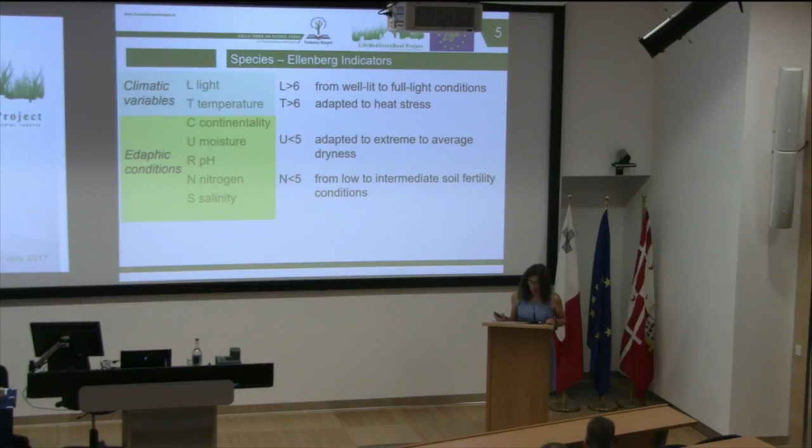In this table, there are Italian species cultivated in the green roof simulator and their Ellenberg indicators. In this table, I reported only the species of the Italian green roof built during the project. We observe they belong to the two biological forms of hemicryptophytes and chamaephytes, and their habitat of origin is often arid, sunny, and stony.

Other parameters to consider might be physiological ones like water need and water stress resistance, type of photosynthesis, C3, C4, and CAM plants, and chlorophyll and carotenoid content.

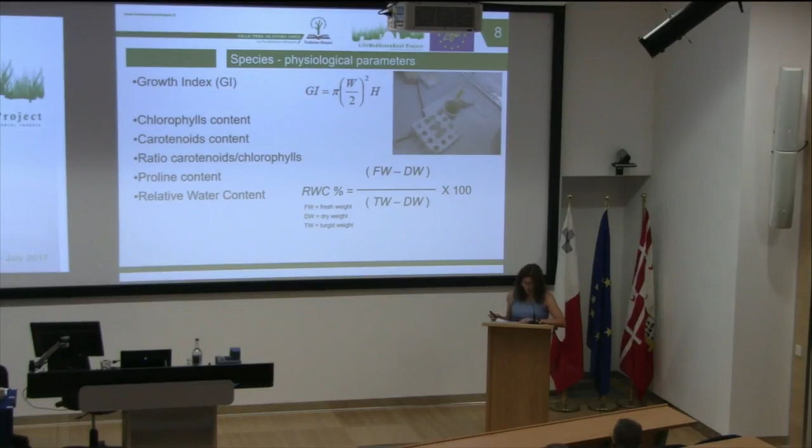During the project, we tested the resistance to water stress in many green roof species, and in particular, we evaluated growth index, chlorophyll and carotenoid content, the carotenoids/chlorophylls ratio, proline content, and relative water content, an analysis which describes the water status of the plant over time. For each species, plants were irrigated with the gravimetric method according to 3 different values of pF.

pF is a numeric index correlated to the water potential, which quantifies the work plants have to spend for root absorption. pF is the co-logarithm of the absolute value of water potential, and its advantage is the simplicity of its scale, because it may vary from 0 to 7, and it has a linear scale and not a logarithmic one like water potential.

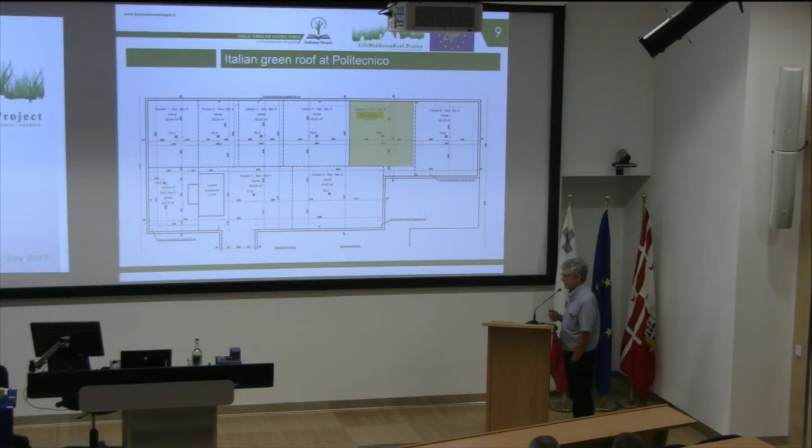In Milan, you have already seen the position of the plot. It is a 30 square meter area. It has been planted with our species in the same arrangement. This is how the green roof at Politecnico is done. Please consider that this building is much older than ours. It is maybe more than 30 years old. And this is building 15 of the Politecnico.

You can see the slab and the sensor. You can see the heat flux sensor, the temperature sensor at various levels.

Here is an example of how we do the recording of the data, done by means of software that takes the records and puts them in a MySQL database, then uses it to make a graph. Now we start with the data we recorded.

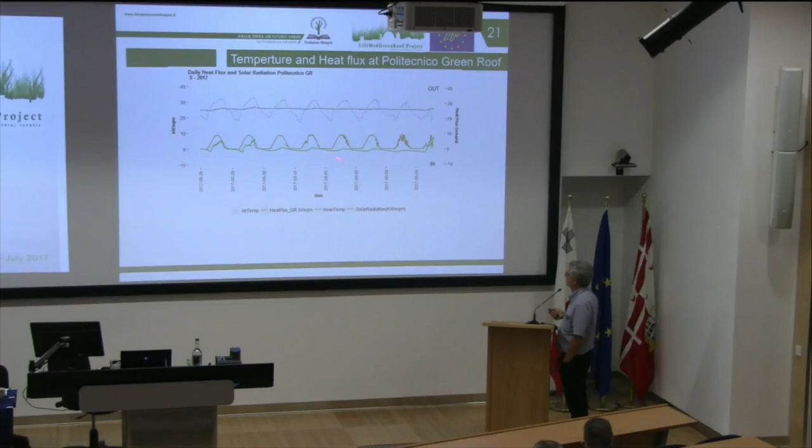But even in a green roof, in summer months, there is a gain of heat.

This gain in energy in Politecnico, but not in Minoprio, can be explained by the fact that the technology of the roofs has changed in 30 years. So we have a very low U value, while the Politecnico buildings have a higher value of transmittance.

The difference in behavior of a green roof in springtime has been reported also in foreign experience, where green roof in springtime sends outside more energy than a reference roof.

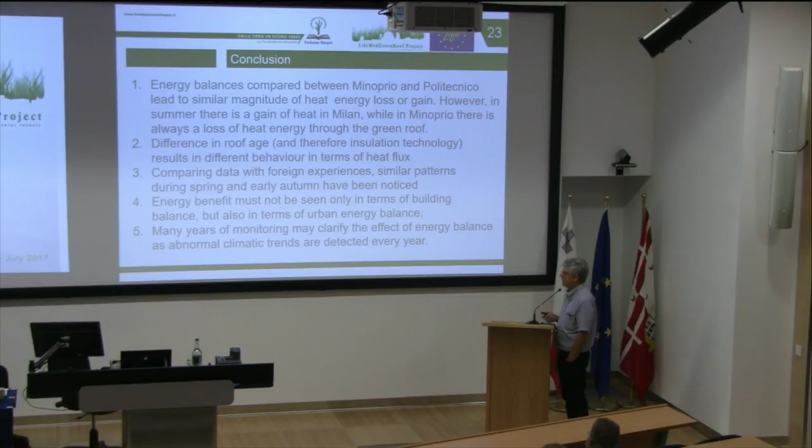I'll be introducing another document that we have drafted, which is a policy proposal document. I will be followed by Mr. George Cutajar, there he is, from MCCAA, and he'll be speaking about the green roof standards for Malta.

After that, we would have Chiara Catalano. She will be introducing biodiverse green roofs, and we'll end our session with another LIFE project in Poland by Kinga, it's the Radom project. Okay, and then we'll hope to have some time for discussions and questions. So I'll try to go as quickly as possible because we are a quarter of an hour late.

It is widely accepted that urban areas have problems, and that these problems are affecting our quality of life. Green roofs are considered as part of green infrastructure, and they have proven benefits to society in a number of ways, and these benefits are both for the individual, the community, and biodiversity.

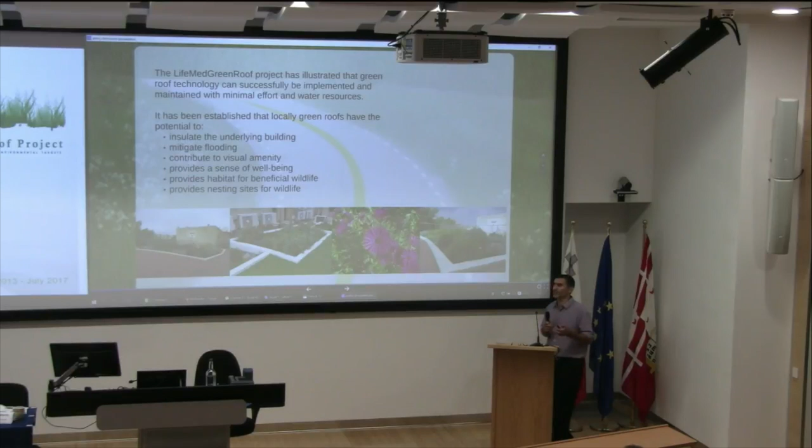The LifeMed Green Roof project has illustrated that green roof technology can successfully be implemented and maintained with minimal effort and water resources. We cannot say otherwise, plants need to be watered, but it is not as demanding as one might think in terms of water and even in terms of management. It all depends, however, on the type of species one uses, and what one expects.

We've mentioned that when green roofs are installed by individuals, they contribute to social benefits as well. We have to keep this in mind. When an individual installs a green roof, the benefits are not just enjoyed by the individual, but they are also enjoyed by society. So whoever constructs a green roof is contributing something to society.

However, although green roofs provide a number of social advantages, it is the private benefits which will induce owners to install green roofs. We have to be realistic here. Nobody is going to spend all that money to build a green roof so that his neighbor enjoys the view. The individual has to enjoy the green roof as well. So it is in the interest of a nation, in the interest of society, that green roofs are replicated through policies, incentives, and regulations.

Green roofs' benefits are only experienced if the technology is widespread over the territory. Our green roof here will not solve any problems, but it might have solved some issues with our administration, because now rather than looking over the black membrane, they're looking at some plants. They've got butterflies there and birds. And that sort of benefit is realistic.

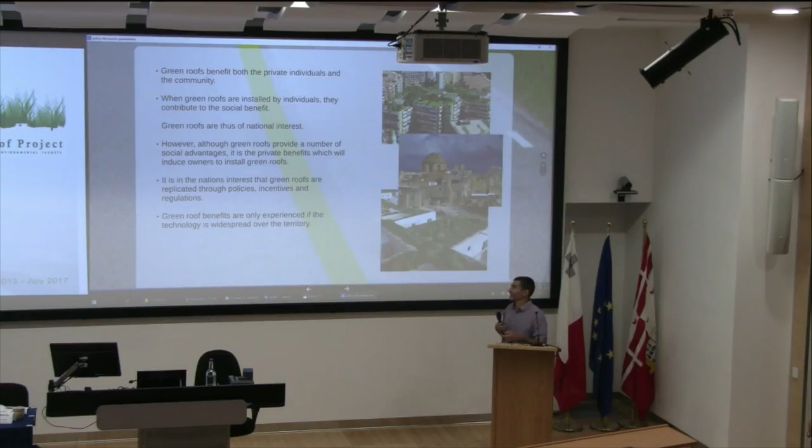So obviously it's useless. We cannot wait for people to voluntarily construct green roofs. It's not gonna happen. We know what happens with PV panels - nobody installed PV panels before the incentives were put in place.

6 phases have been identified in establishing green roof policies. These phases are not rigidly classified and can be implemented as necessary and are interchangeable. I'll go through them quickly.

Introductory and awareness: stakeholders are to be made aware of green roofs and their benefits. Such awareness can be instilled through workshops, information sessions, visits to demonstration green roofs. This is one of such activities.

As the LifeMed Green Roof Project, we've had published articles in newspapers and other journals, organized public lectures and information sessions. We had NGOs asking us to conduct lectures, and even schools. We had the Department of Education come here and visit the roof, because that is a very important education tool. Throughout these past 3 years, we had a lot of information sessions, and we tried to introduce green roofs to schools as well and other entities.

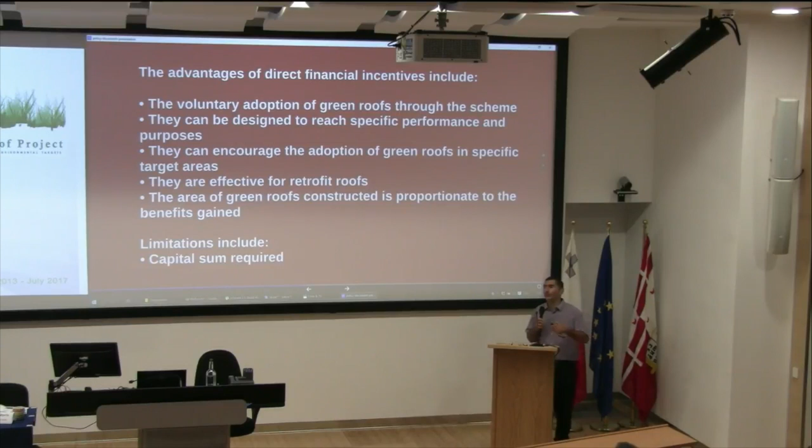The advantages and disadvantages. The voluntary adoption of green roofs through the scheme, so you have people actually volunteering to construct green roofs on their property. They can be designed to reach specific performance and purposes. They can encourage the adoption of green roofs in specific target areas. They are effective for retrofit roofs, and the area of green roofs constructed is proportionate to the benefits gained. Limitations include capital sum required. Obviously, if government has to reimburse a sum of money, then there has to be capital.

Indirect financial incentive relates to the pay-per-use of stormwater disposal and usage. That is charges for water consumption. So the more water you consume, the more money you have to pay, and also water runoff from the properties. What does this mean? If you have a property which is totally built or consisting of hard landscaping, so no water is practically absorbed, it all goes into the street. So you pay a sum of money because you are actually constituting a problem. You're directing water that lands on your property into the public domain, and that is contributing to flooding.

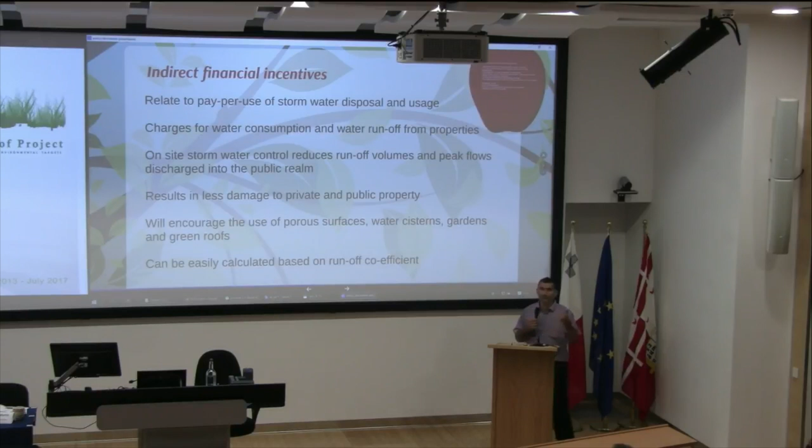On-site stormwater control reduces runoff volumes and peak flows discharged into the public realm. So if you have a well, if you have a garden, if you have a green roof, then obviously you are contributing to reducing the problem. So obviously you get less fines, so to say. You're less taxed.

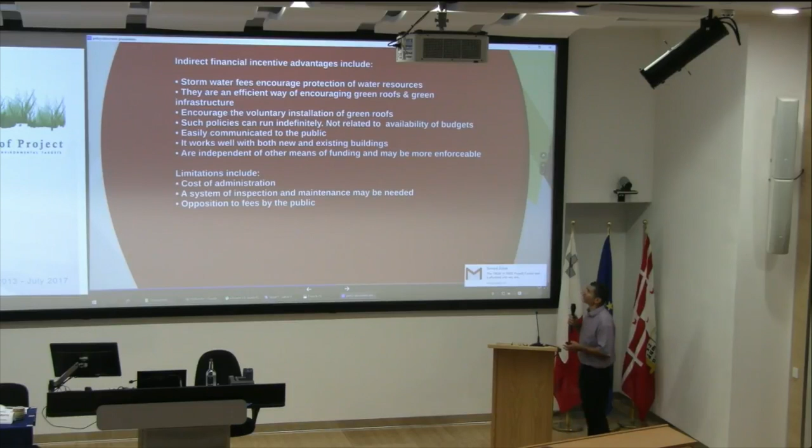Indirect financial incentive advantages include stormwater fees that encourage protection of water resources. They are an efficient way of encouraging green roofs and green infrastructure. Why? Because if I've got a property which is totally built, if I put a green roof on top, then I get a reduction in the fines or taxes I have to pay. They encourage the voluntary installation of green roofs. Such policies can run indefinitely because the policymaker wouldn't need capital. Easily communicated to the public, they work well with both new and existing buildings and are independent of other means of funding.

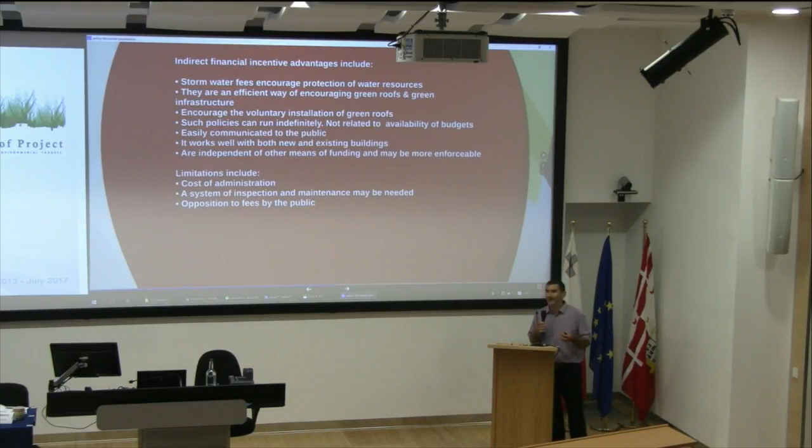Limitations: cost of administration, a system of inspection and maintenance may be needed, and opposition to fees by the public. Obviously, if you're going to tell people they have to pay, they will oppose it, but after all, that is what you want because you want green roofs and other green infrastructure to be implemented.

Ecological compensation. This looks at greenfield and brownfield sites which contribute towards mitigation of flooding and biodiversity. If you've got an unbuilt plot, any water runoff which finds its way into that plot is absorbed, and so you are contributing to mitigating flooding there. Their construction reduces public benefits. Green roofs compensate for such losses. If you had to build a green roof over a plot which has been newly built, then you get compensation for that.

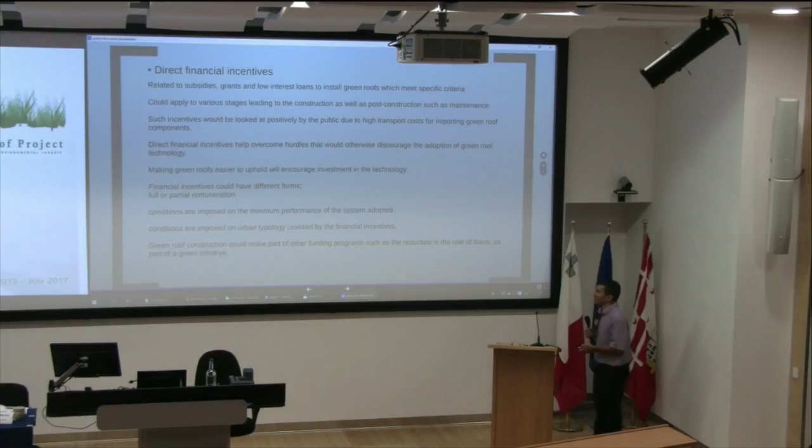Indirect financial incentives, personally, to be honest, I think this is the fairest of all incentives. Why? Because much of the problems we have today, if we're looking at flooding, for example, are happening because of soil sealing and the lack of water harvesting facilities. We know that there are a lot of buildings being constructed without wells. So people are getting richer, they're getting financial gain, but at the same time they are loading the public with problems.

So I think putting a fee on soil sealing is a very fair system, whereby if you have a green roof, if you have permeable surfaces, according to the coefficient of your system, you get a discount. And I think that is pretty fair. Obviously, with policy makers, it doesn't sound right because people won't agree to it. But then again, if I ask who wants to pay taxes, nobody would want to, but we still do.

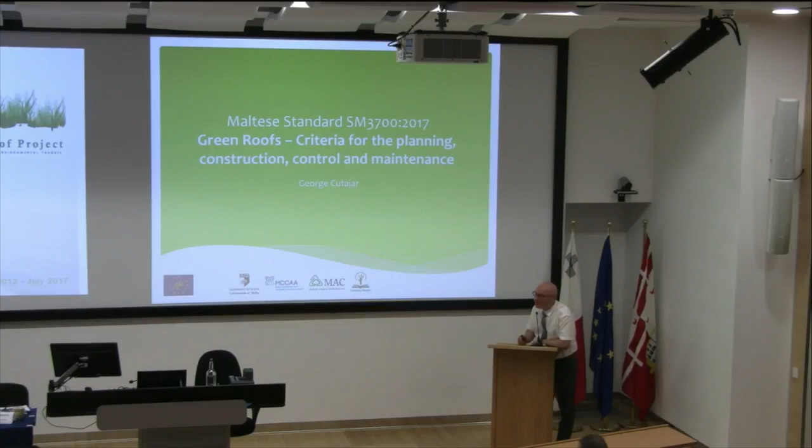So, good afternoon, everyone. I am George Cutajar, from the Malta Competition and Consumer Affairs Authority. Back in 2013, the LifeMed project approached MCCAA since we, as an entity, have the legal obligation to develop national standards. Back then, in 2013, they approached us and we agreed that we go for a national standard on the construction of green roofs.

In 2016, I think at the middle of the project, we started the project for developing a national standard. The process mainly consists of setting up a technical committee made up of national experts. We invited these interested parties to develop the standard. In fact, the standard is published, and it also contains reference to all those participants that developed it. So, a brief description of how we developed the standard: basically, the national standard was developed in 9 months.

We had a series of meetings, and after we had the final draft, the standard was put for public consultation. During this period of 2 months, we invited feedback from interested parties outside the technical committee on the actual standard. During this time, we received one type of feedback regarding the life cycle perspective of the material used in the green roof itself. In, I think, June, we published the standard. As an authority, we have the remit to publish the standard in the Government Gazette.

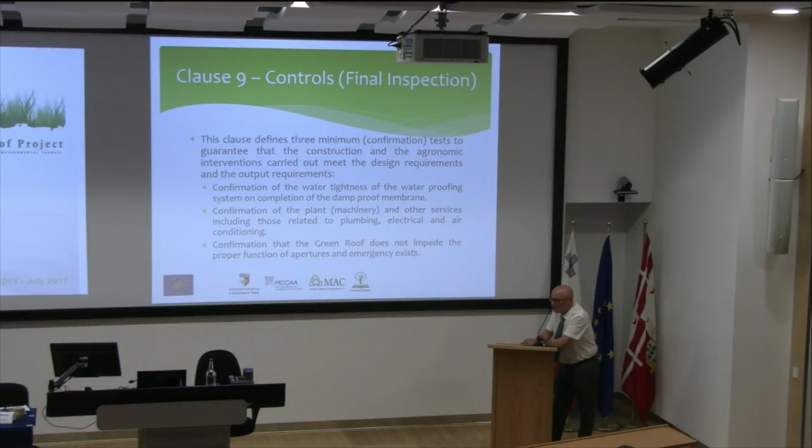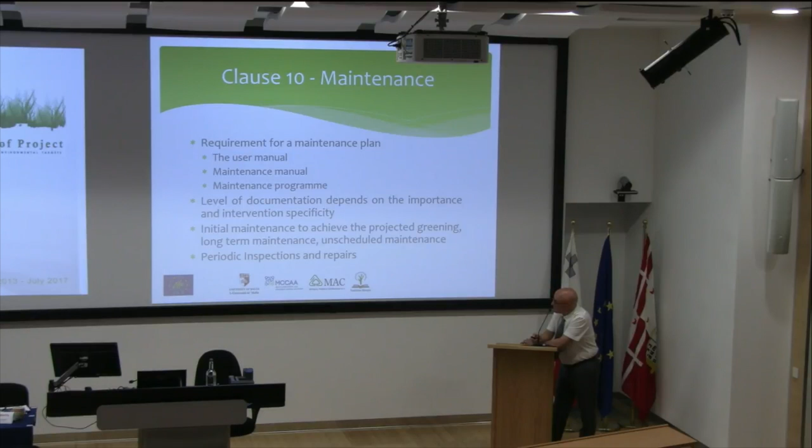We also considered maintenance, requirements for a maintenance plan, issuing of a user manual. When one comes to commissioning, one can deliver a user manual, a maintenance manual, and also a maintenance program. The level of documentation depends on the importance and intervention specificity. Initial maintenance to achieve the projected greening, long-term maintenance, other unscheduled maintenance, etc. And at the end, periodic inspections and repairs. Of course, it all depends on the type of green roof that one is considering. So that was the last clause of the standard.

The standard is currently available from MCCAA. I am sure that, for example, architects and other companies in this field would like to review this standard. I am giving you the contact through whom we can make the standard available, even for regulators, for example. Thank you.

So the topic, as Antoine already said... first of all, thank you for the invitation. And I apologize for Stefan Brenneisen, who is my boss, actually. He should also be here, but he couldn't make it. And so I'm glad that I finally visit Malta, even though I'm a neighbor, since I come from Catania. I never visited Malta, so that's my first time, and I'm very happy to be here.

So the topic of my presentation today is biodiverse green roofs. As a matter of fact, I also did a PhD on that topic, and I also developed some Mediterranean features that I will explain at the end. So I will then go into some examples in both temperate, which is actually a Swiss, German experience, and then

Mediterranean situation. Maybe can I have the microphone, because I feel like I cannot move. But yeah, whatever. So first of all, as has already been mentioned by many today, actually I have the impression it has been a very long conference, but as a matter of fact, it's only one day.

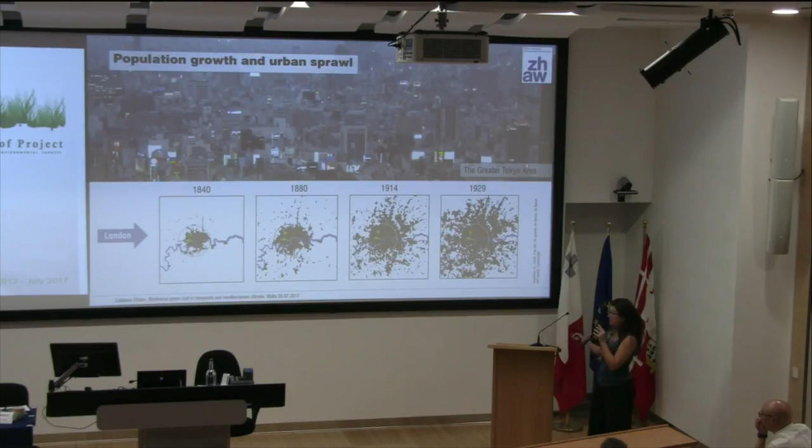Of course, that's a very simple example of how the city is actually eating into the surroundings. That's why we talk about city metabolism in general. And this is just a scheme done by a Finnish architect, Eliel Saarinen, in 1943. He was sketching the development of London from 1840 to 1929. And nowadays, of course, the situation is even more extreme.

As I mentioned before, we talk about urban metabolism. And ecologists consider cities as heterotrophic ecosystems. What does it mean? It means that cities consume energy from outside sources, and they transform it to run transportation of people and goods and to develop technology, industry and products in general. So what is happening in cities then affects the environment, in the sense of heat and waste in general, just to be easy.

But of course the result is very clear and evident, in the sense of the alteration of biogeochemical cycles and the alteration of local climate. As for biogeochemical cycles, I mean water, for instance, because we spoke a lot about water cycles, which have been completely altered by soil sealing. And then local climate, so the urban heat island effect, and of course pollution, the fine particles, etc. As regards land use and cover, we are all aware of continual soil sealing. And finally, which is the connection to green roofs for biodiversity, it is causing habitat fragmentation.

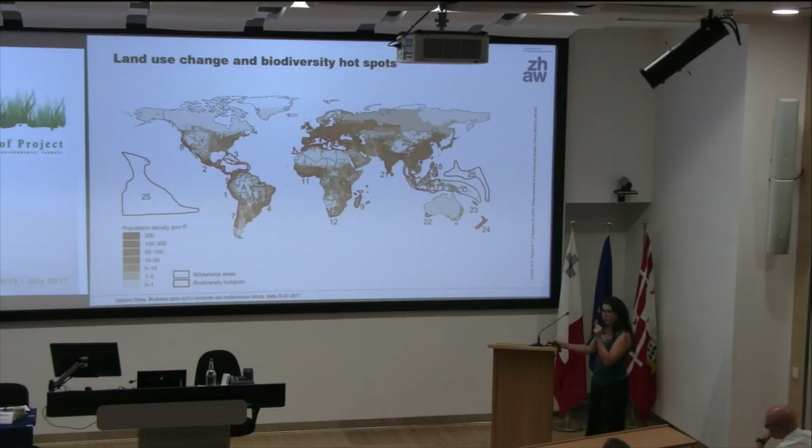But what's the problem? Where is the conflict between nature, habitat fragmentation and the development of cities? The problem is that cities are not randomly spread around the planet. Actually, population density is concentrated in biodiversity hotspots, and one of the hotspots is the Mediterranean basin, where we are. That's why we absolutely have to concentrate on urban environments. Urbanity is becoming ever more popular and constant, and that's why it is the place to intervene. But there is a but.

Fortunately, there are designers who see the glass not half empty, but half full. And I quote here Gilles Clément, a French landscape architect. I really like this concept of the third landscape, because it describes very well the situation of the habitat remnants inside the urban cores, as is shown there.

So that's kind of a scheme of a settlement. You have scattered habitat fragments, which are denser and smaller in the cores, and then bigger but more distant areas in the peripheries. And the biodiversity of the third landscape is influenced by the pressure of the anthropic territory.

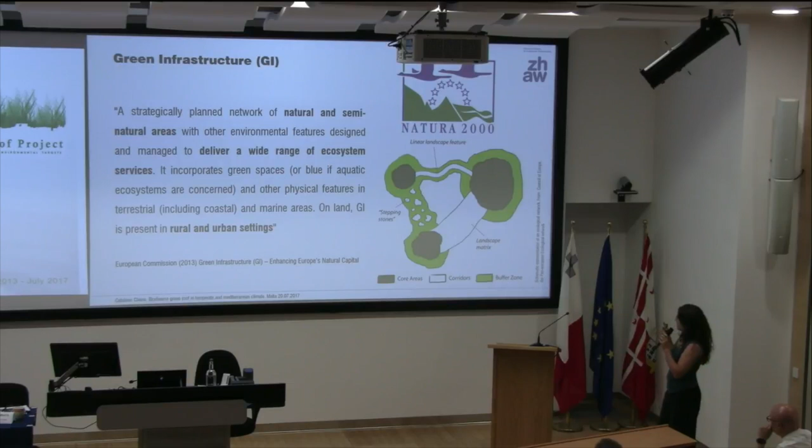Then we go into green infrastructure, because this third landscape is indeed the green infrastructures, and in particular the urban green infrastructure. The backbone of the green infrastructure in Europe, as everyone knows, is the Natura 2000 network, defined by the Habitat Directive and the Bird Directive in 1992 and 2009. What is important for the survival of this network is the connection between them via stepping stones and ecological corridors.

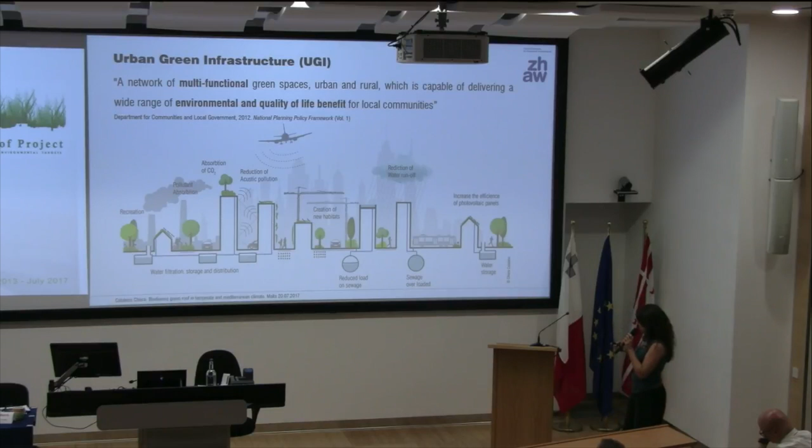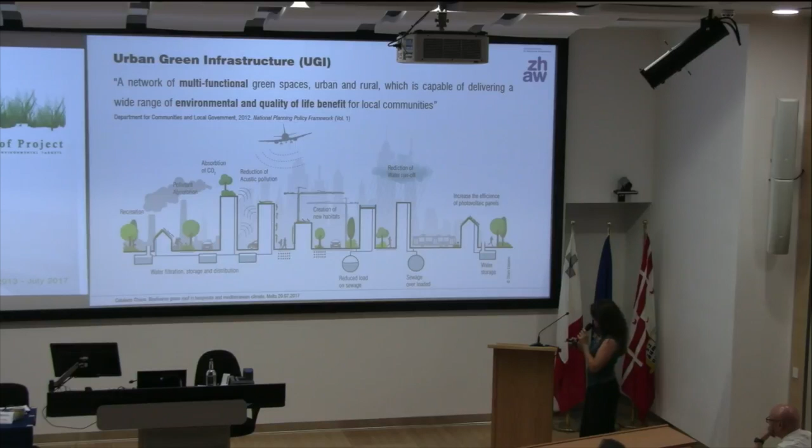So finally, green roofs are part of the urban green infrastructure. I like this definition because it's simple and easy: green roofs can be synthetically defined as surfaces covered with growing medium, intentionally vegetated and/or spontaneously colonized. I like to highlight this 'spontaneously colonized', because actually green roofs started just with spontaneous colonization on the old German roofs of the 19th century.

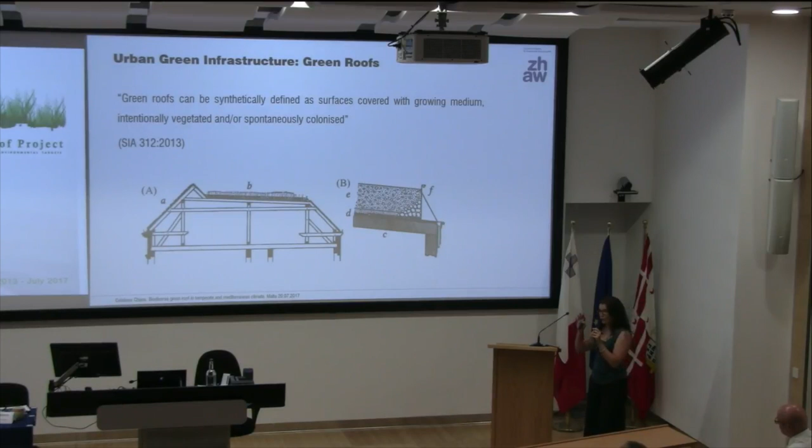So it's something we have to keep in mind, that green roofs are not like a static ecosystem, but they are dynamic. So we don't have to just try to make them like a picture. It's not a review like a journal, it's life.

And those are some green roofs which I investigated in 2015. I made a study on these roofs, which are part of a settlement. And that's the Waldorfschule.

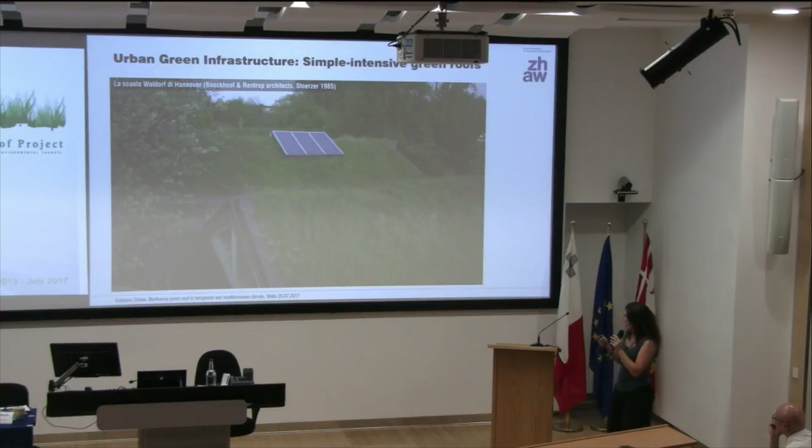Do you know the Waldorfschule, how this works? It's kind of a Steiner method, alternative methods of teaching to kids. And they have green roofs, and they don't touch them, they don't maintain them. We made a 30-year survey on those roofs, just to bring some proof that it's possible to have green roofs without such a high maintenance cost as well.

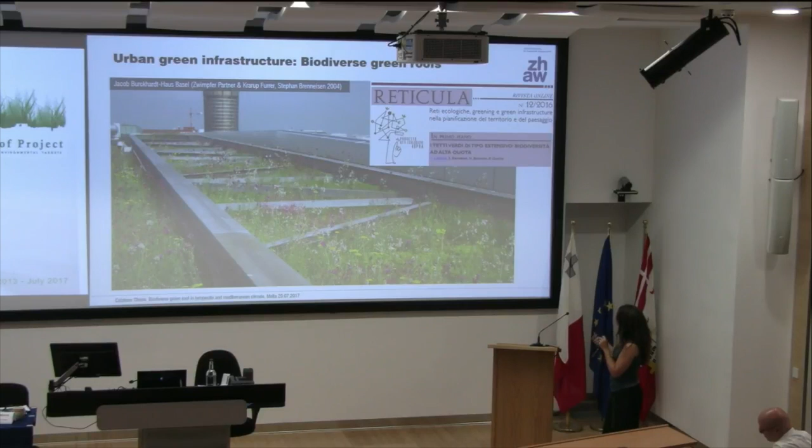And then finally, biodiverse green roof. For me, this is a fourth typology, and not only for me, because the British UK code, the GRO code, is now using them as well as a typology. What is characterizing the biodiverse green roofs? What are the key design principles of biodiverse green roofs?

So first of all, the different thickness and substrate kind. Why? Because in this way it's very easy to have different biocenosis. So the first thing to adjust is the substrate. The first rule is not just to have a constant thickness, but to vary it and provide different habitat possibilities for wild flora and fauna.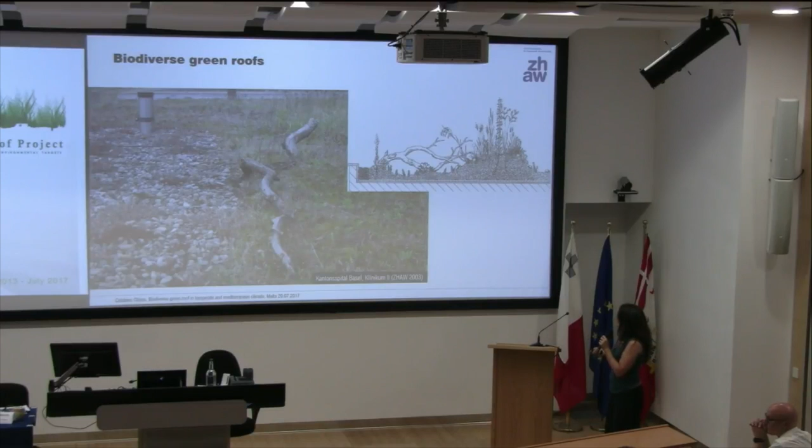Together with that, there have also been used some structural designing features, in particular some trees and bushes - they're not bushes, they are dead plants actually. So some woods and trunks, normally piled, or just branches put around, just to provide shelters for insects, and also to provide local conditions for specific plants, and also temporary ponds. Because we used to consider green roofs just as sedum or mosses or chamaephytes, so kind of woody species dominated areas. But as a matter of fact, if we vary and adjust the materials with which we are doing the green roofs, we can have a variety and very impressive biodiversity.

And this is Drosera rotundifolia, for instance. This is a colonizing species habitat, a very wet habitat, which one wouldn't expect to find on a roof, but actually it's possible, just using the right materials. In this case, rock wool was used as a water storage system, basically.

Some of the biodiverse green roofs turned out to be biodiverse over time. So most of them are also kind of a surprise. That's why I think it's important to keep in mind this word, spontaneous, not try to control every single development of the roof, and also accept the development.

And something interesting is that some birds, some ground-nesting birds, like the lapwing, Vanellus vanellus, are starting to nest on green roofs because of lack of spaces. There are no normal natural habitats, so the birds are starting to nest on this kind of roof. The problem is that the chicks need food and water, and normally these kind of substrates, shallow green roofs, so the sedum-dominated roof, do not have enough food and water reservoir. That's the reason why there is like a trunk, put all around the perimeter, to prevent the chicks from falling down from the roof, and also there are temporary ponds where they can find water during their life cycle.

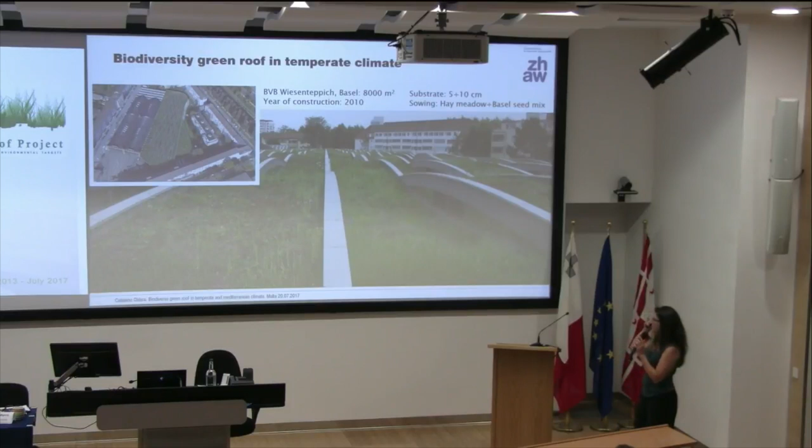What's interesting here is that the architects collaborated with biologists, and they created waves and flat parts. By doing so, you have hills and valleys, and of course the water goes to the valleys, creating different habitat possibilities for species, which is actually what's important on green roofs. We create habitats over there. It's not just a matter of energy saving and water cycle, but we also create habitats.

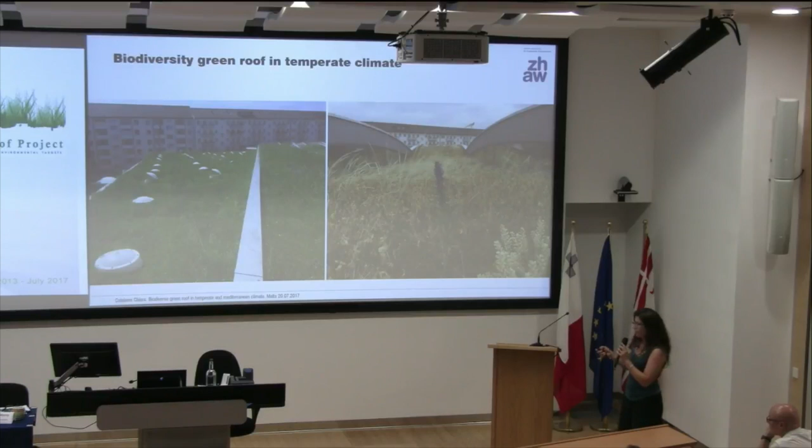And right in front, Alyssum species and Vulpia species as grass, and some Trifolium campestre and fantastic Echium vulgare still flowering. So again, what's important is to accept the cycle - the roof is not dead, it's alive, just staying quiet for a while.

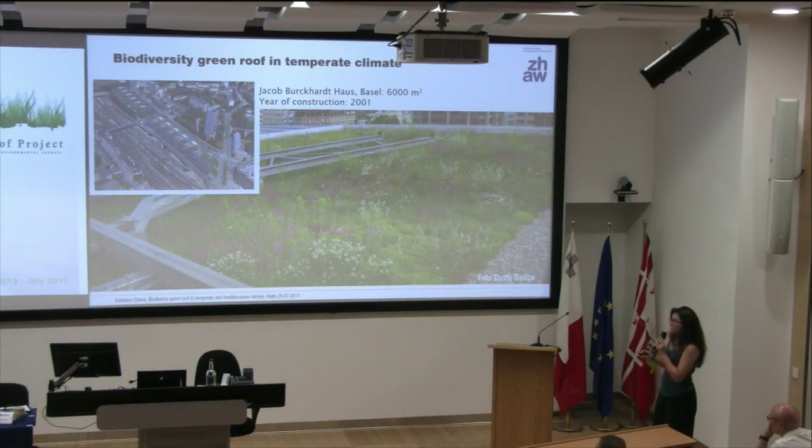This is another roof, Jacob Burckhardt Haus, about 6,000 square meters, built in 2001. This roof is along the railway station in Basel, actually between the French and Swiss rails. Here the same principle applies, but with the difference that here we have commercial substrate, which is mineral-based, and the biodiversity features overlay it. In this case, we have sandy gravel stripes, or just sand areas where ground-nesting bees can nest, and so on.

And finally, as a last example for this first part of the presentation - don't worry, it's not long, just pictures, because I want to create some inspiration, which I hope is working.

This is the Moos water filtration plant, or Seewasserwerk Moos in Zurich. This was built, and this is not a mistake, in 1914, so it's more than 100 years old, this green roof. It's a biodiversity conservation area. When Elias Landolt, one of the famous botanists in Switzerland, visited this roof, he made a species list of 170 different species and 9 species of orchids. Among them, Orchis morio, which has nowadays basically disappeared in Zurich, but over there are 30,000 individuals - not a mistake, 30,000 - together with Dactylorhiza and Listera ovata.

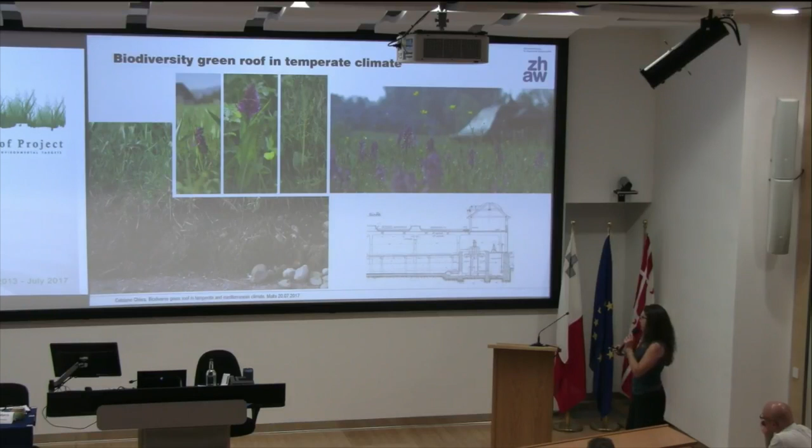After all these examples, what happened in Switzerland in 2013 is they made a regulation - the first one to consider the nature conservation aspect included in the regulation. They distinguish 3 kinds of green roofs: basic, advanced, and special.

It's clear that the advanced ones use this biodiverse principle I already explained, so I won't go into details. But what's important to mention is how to collect the species and where they come from. Of course they have to be Swiss ecotype, meaning from the region, and can be of 2 kinds - from the biogeographic region, or with regional specification, which makes a difference in classes. The best option is to collect seed locally or transfer it with hay. Someone mentioned today, why don't we mulch? It's actually known as a mulch technique.

So actually the hay is directly taken from a donor meadow and brought onto the roofs. So in this way we have a double benefit for the roof itself. You take the seed material, which is native and also genetically diverse, and you also protect the substrate when it's bare substrate. And so in this way, basically, humans act as a dispersal vector, overcoming the fragmentation,

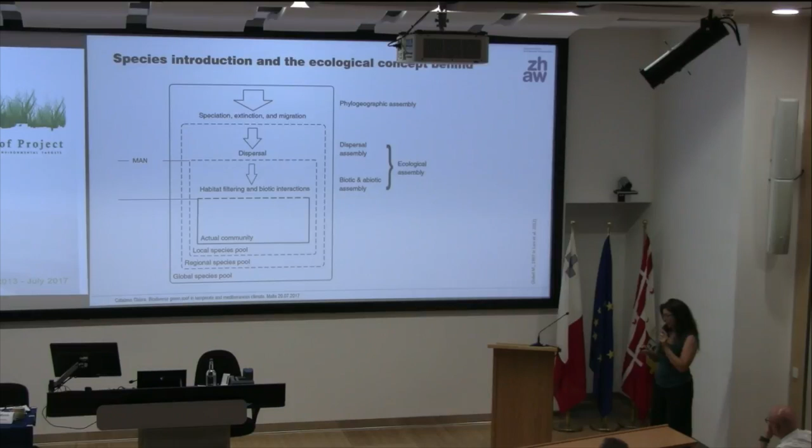which, as I mentioned before, is created in our landscape. But then, of course, the final assemblage of the species, even if we want to bring wild species, wild flora, will of course be influenced by the local conditions or the city conditions.

Just one example about this technique. This was a roof still in Zurich, Technopark, of 1,700 square meters. And in this way, we wanted to improve the situation. It was sandy gravel, varying from 10 centimeters to 20 centimeters. And since the workers of the building wanted to produce honey, so bring some beehives, we wanted to bring up there some flowering plants, and we applied this technique,

which means applying fresh hay cut in September. And we collected seeds for 3 months from dry hay.

So what about the Mediterranean climate? If you want to bring this kind of Swiss-German knowledge into the Mediterranean area, first of all, we have to consider that this is nowadays recognized as a standard approach, the habitat template approach, which was developed surprisingly at the same time in Canada. And for the Mediterranean case, we have some theoretical thoughts at the moment.

We don't have any practical example, but we have species lists, of course, from habitats that, as we already heard today, are similar to that on the roof. But of course, it depends on which kind of substrate we are using. But what I think is also important is the annual aspect.

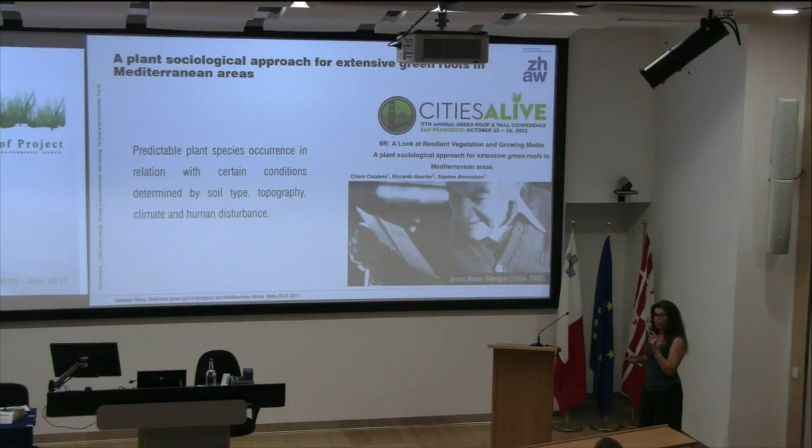That's because the idea is to have a continuously covered green roof. But as a matter of fact, in the Mediterranean climate, we have more annuals than others. So it's a component which I think we should consider. I want to present here this plant sociological approach, which is a particular kind of habitat template approach.

I'm about to finish. It's kind of easy, because you have a database of Natura 2000 habitats already done by ecologists. So you have plenty of habitats which can be easily reproduced or mimicked on green roofs. And of course, we cannot normally use phanerophytes and hydrophytes. And we should go for, as said before, hemicryptophytes, chamaephytes, geophytes, and therophytes.

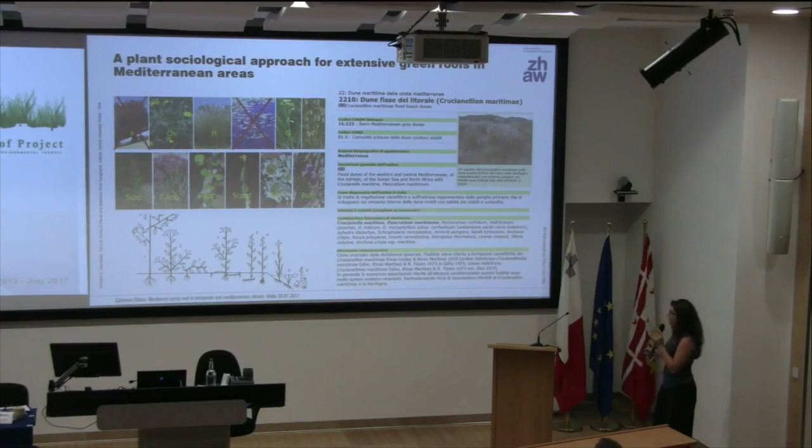Then the habitat could be chosen according to the substrate, which I already experienced being used in Switzerland as a standard, common substrate. So a sandy substrate with gravel, pebbles, and sand, as I mentioned before, and xeric substrate. So actually the soil can of course be amended and doesn't have to be used straight away in this way, to fit the actual norms.

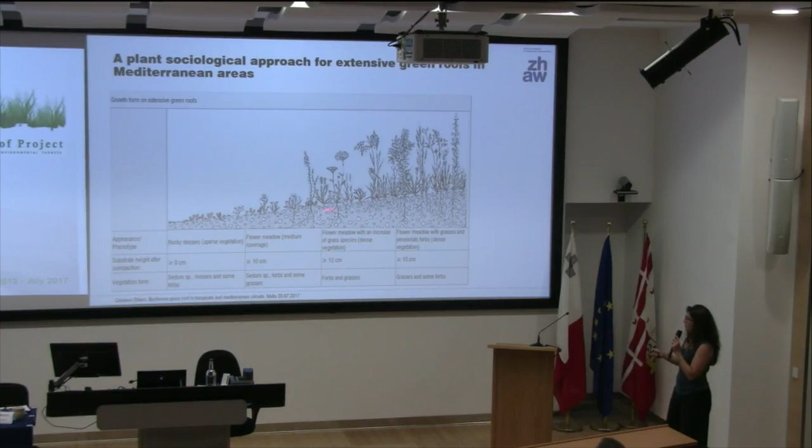And the idea is, as I mentioned before, when we vary the substrate thickness, we also vary the potential of the plants to establish. So the vegetation varies from pioneer species to a more or less balanced mixture of forbs and grasses. Those are some examples of habitats.

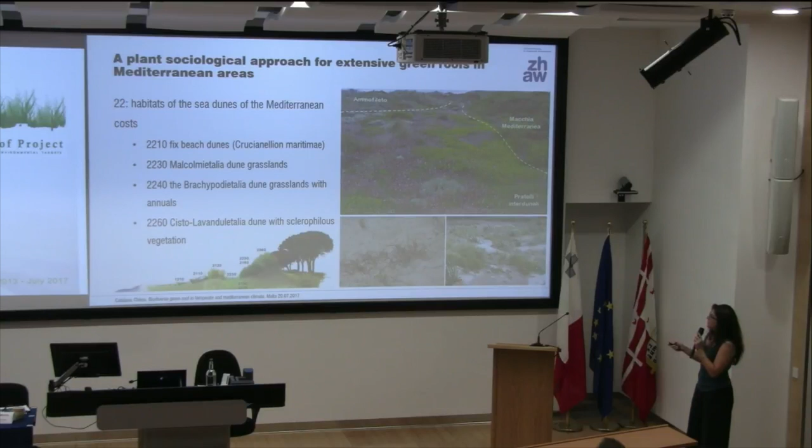I will just go through the pictures, and what I think is important to make clear is the idea behind the phytosociological, or plant sociological, approach. When you have similar environmental conditions, the species composition tends to be the same, or similar. And that's why botanists invented this kind of classification of species characterizing the habitat.

So if we consider this species list, this assemblage of species already given by botanists, we could mimic not only the habitat as a model, but also the species composition, and since the species live together in nature, we should be able to recreate resilient habitats. The same goes for the other habitats I mentioned.

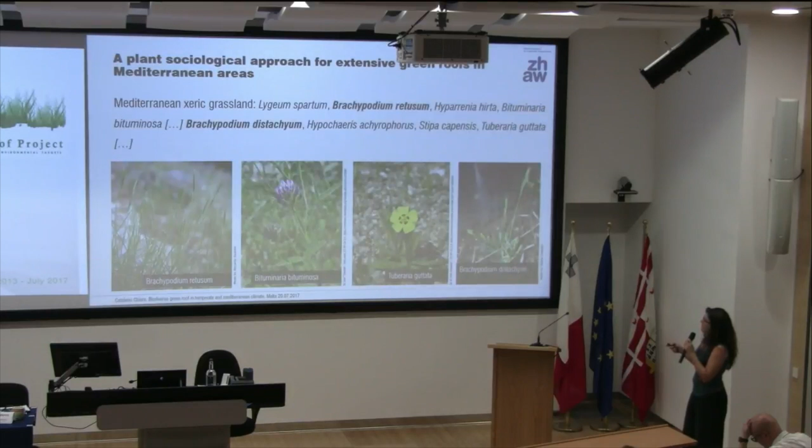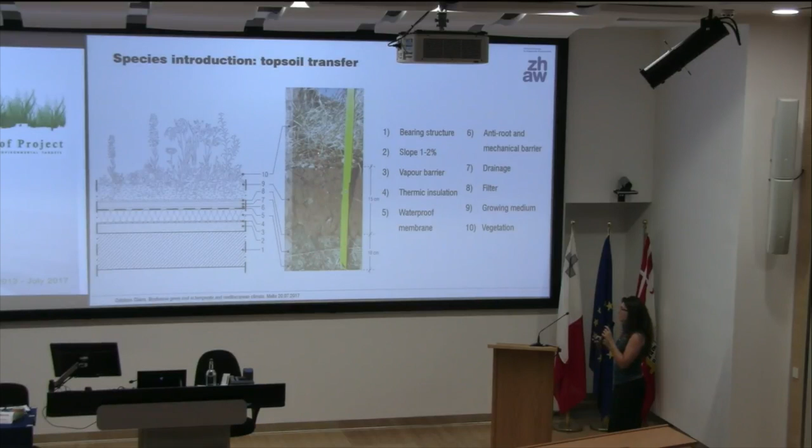That's the last example, the roof in Manarola, Cinque Terre, Liguria. So still Mediterranean, but with more water availability. This roof is even more extreme, because it was never supposed to be a green roof. Actually, this should have been a many-story building. But the people living in Manarola stopped the construction, which was actually illegal, and they just left the waterproof membrane as it was.

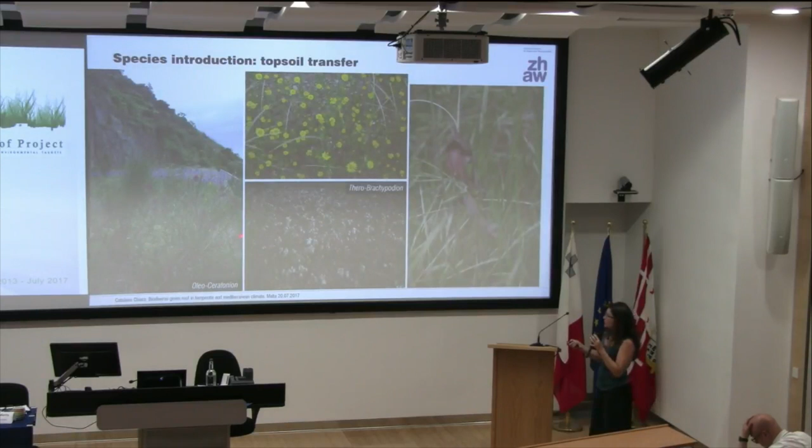But thank God, nature is working for us. There was like an avalanche, and basically the roof was greened by itself. Then local people started to level the substrate a bit and plant some plants. And here you have a spontaneous biodiverse green roof with different substrate kinds, different substrate thickness, and of course biocenosis. In a more shaded area, you have ready bushes from the Oleo-Ceratonion alliance, which is the Mediterranean maquis, and also other annual species, including orchids, that spontaneously arrived there.

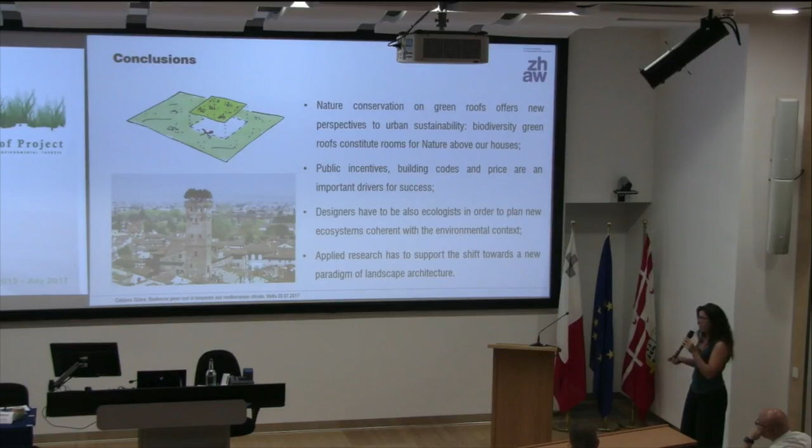So, conclusion. Nature conservation on green roofs, as I hope I sent the message, offers new perspectives to urban sustainability. Green roofs constitute room for nature above our houses. What is very important is public incentives, building codes, and of course the price has to be reduced in order to spread the technology. From the designer perspective, the designer has to have a very strong ecological base in order to create habitats which are merging with the environment. And this new paradigm for landscape architecture has to be supported by scientific knowledge, so applied research.

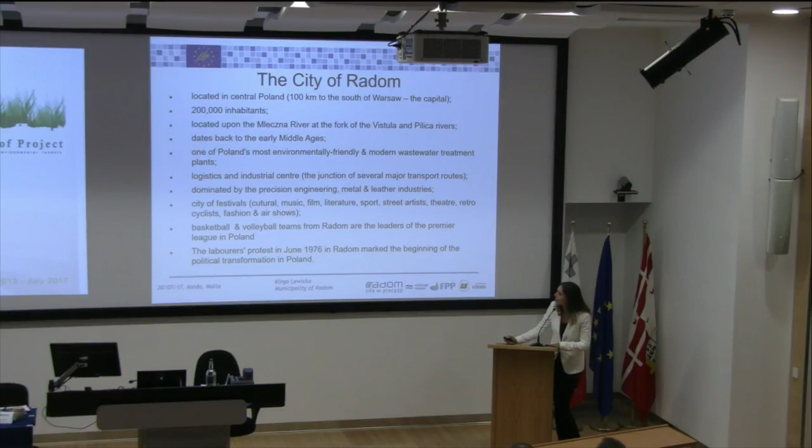As far as sport is concerned, we've got two major basketball and volleyball teams. So there are some sports events every year celebrating those winning teams. In terms of the history, there were some labor protests in June 1976, which marked the beginning of political transition in Poland.

Now, the key point of my presentation, which is called Adaptation to Climate Change through Sustainable Water Management in Urban Areas in the city of Radom. Project location is, as you can see, marked over here. So this is the situation of Radom and the location. The project started 2 years ago, but still we are dealing with some designing works, and the end of it is marked till the end of 2020.

The municipality of Radom that I today represent is the coordinating beneficiary, while we've got 3 other partners. One of them is the municipal waterworks in Radom that are responsible for the technical matters. We've got the Danish partner, FPP Enviro company. This is the think tank company based in Denmark, and the University of Łódź. They are the pioneers in Europe in the field of eco-hydrology.

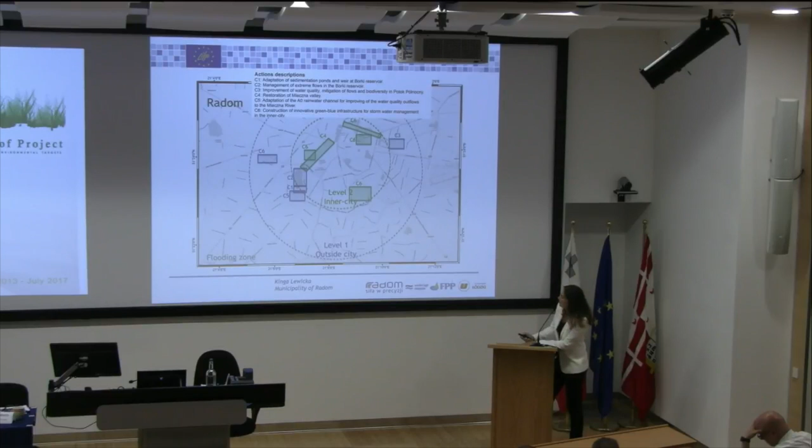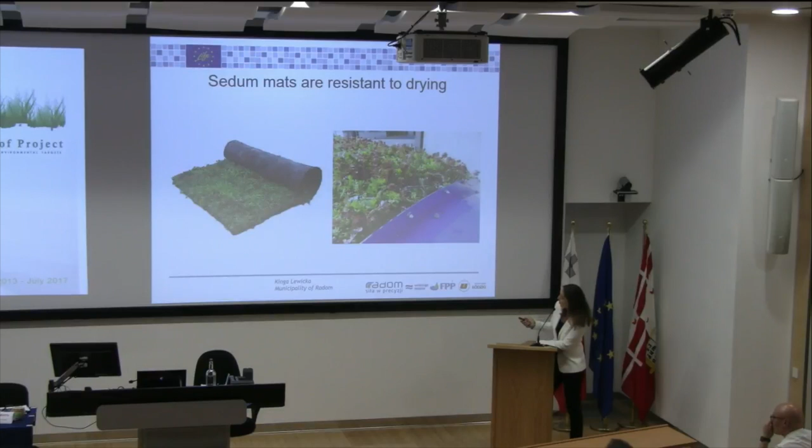Other solutions that we implemented present permeable paved surfaces. They are not only ideal for pavements, but also can be used on playing areas, tennis courts. So they are used in different areas of the city. This is only the showcase in the park.

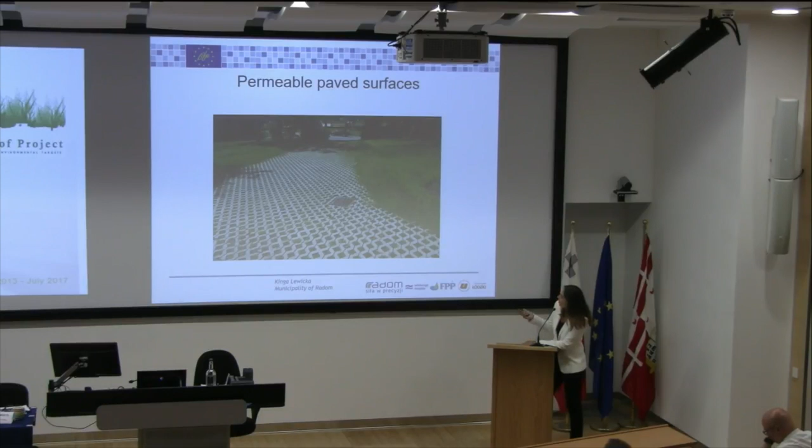Here there's another cross-section showing the solution of a tree trench system. There are many narrow streets in Radom where every square meter is important both for pedestrians and car users. So we decided to implement this system. Trees can freely grow in paved areas. In this way, they use the water from the tank situated below the pavement, and there's no need to shorten the area for cars or for pedestrian zones.

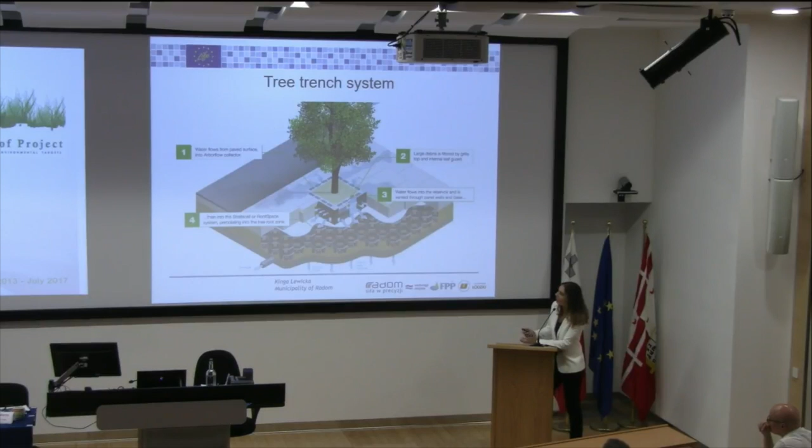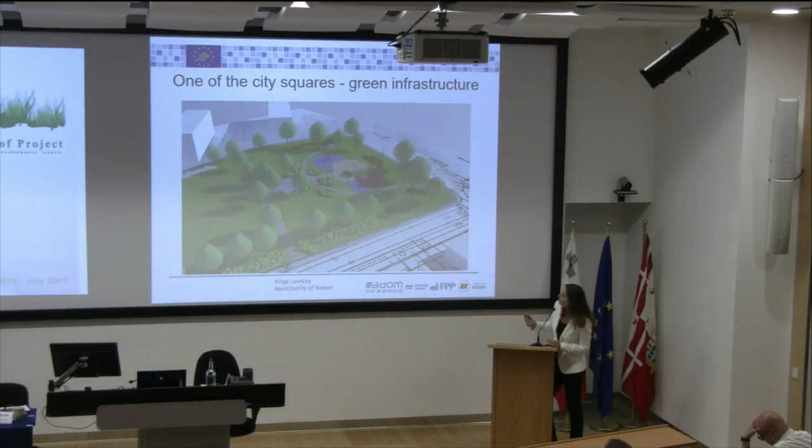There's the place where it was constructed, and here there's yet another example of the square where all those elements of green infrastructure were put together, and there are special rain gardens created near the playing area for kids. They can observe how water circulates in the environment. Of course, there are some permeable pavements just around the whole square. So this is the latest project that is going to be implemented in the next months.

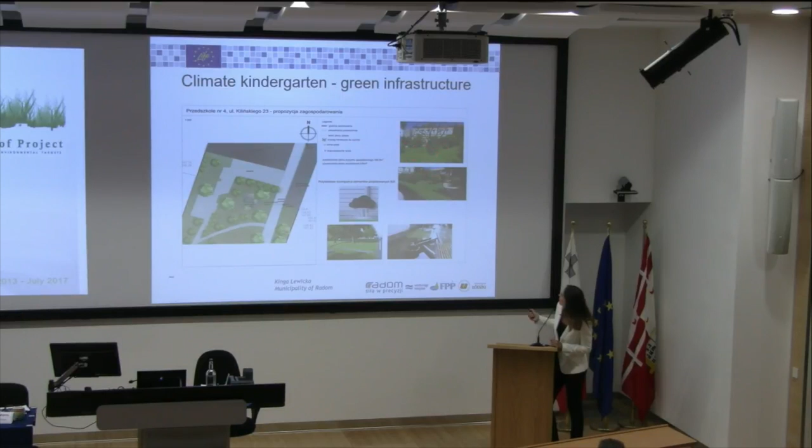Here we decided also to introduce climate schools, starting from kindergartens to secondary schools. Kids will learn how to store stormwater, and they can be later disconnected from water pipes to rain gardens, like here in the picture. And these are the green areas that are going to be used for implementing those actions. Here's yet another example for the secondary school, the same solutions.

In terms of project results, I would say it's the most complex view that has ever been adopted in our city, as retention capacity of sedimentation ponds will increase by 10%. Extreme flows that really interfere with transport in Radom around the Mleczna River will be reduced by 10%. The Borki Reservoir, which is the main city reservoir during the summer, is especially popular among citizens. Its capacity will be increased by 10%.

Again, the purification capacities of sedimentation ponds will be improved by 10% in terms of nitrogen, phosphorus, and iron. Of course, those new innovative solutions concerning sediment biofiltration systems will be applied, and nutrients will be reduced by 20% annually. In terms of total suspended solids, it will be 40%. Those results will increase resilience capacity in the urban area, as well as help to increase the number of biodiversity habitat areas in our city.